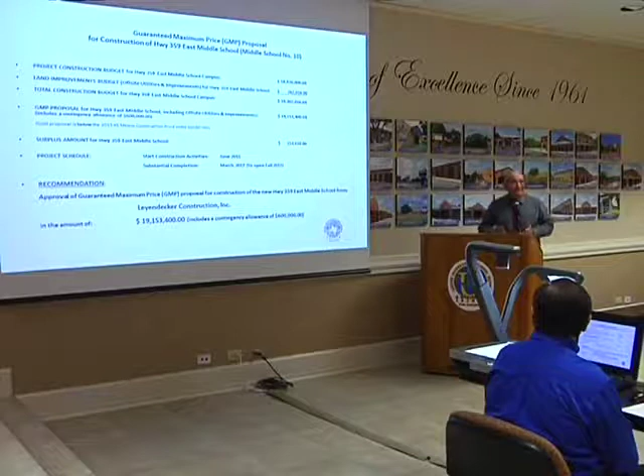As far as the timeline, we're looking at starting June 2015 to complete it by March of 2017. It's late to open in the 2016-2017 year, but it would open in the fall of 2017.

So our recommendation at this time to the committee is to approve this guaranteed maximum price proposal for a construction turnkey of the new Highway 359 Middle School from Leyendecker Construction in the amount of $19,153,400. This includes a contingency allowance of $600,000, already included in that $19,153,000.

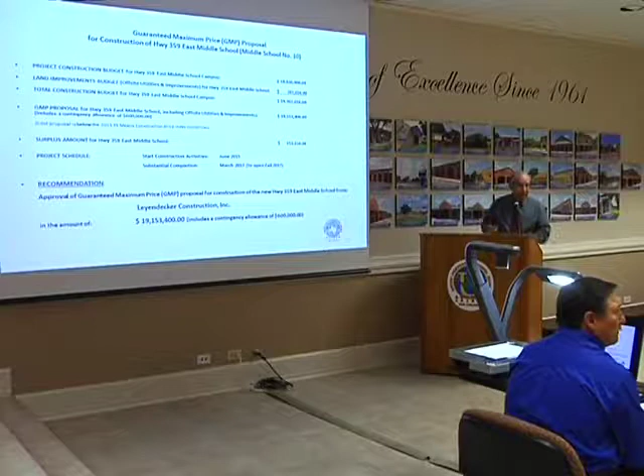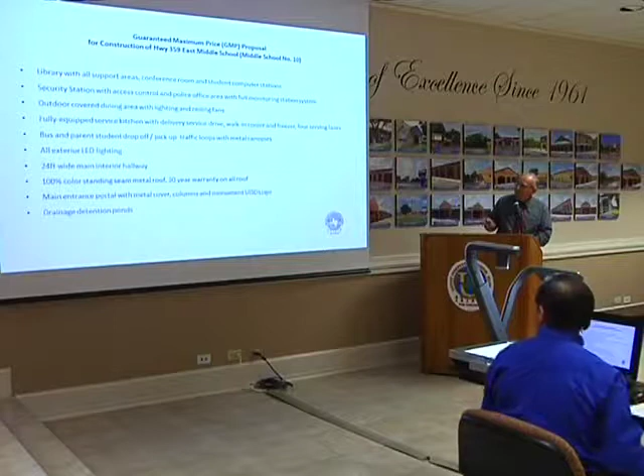In your handout, there's some description of the amenities included in this middle school. As you're familiar with, we presented it before: 1,000 student capacity, and it's basically all of the standards that UISD requests on all of our projects.

We do have some renderings on another PowerPoint from the architects of record who are working under Leyendecker Construction, Munoz and Architects.

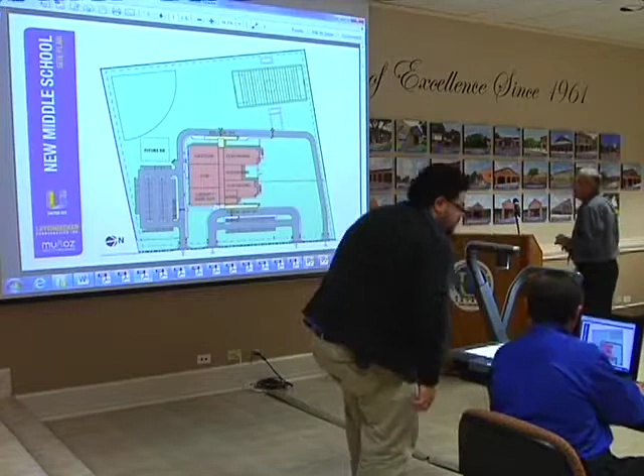There it is. Okay, this is our site plan, which we based the GMP proposal on. This is E.G. Ranch Road, which is currently already built to about right at this point. There'll be a little bit of extension required, but we do have the traffic loop, typical of all our middle schools. We have another loop for parents pick-up and drop-off, metal canopy, parking for staff, and all the athletic fields.

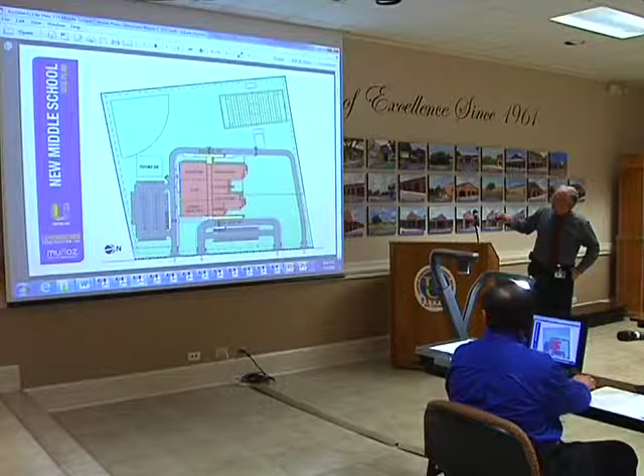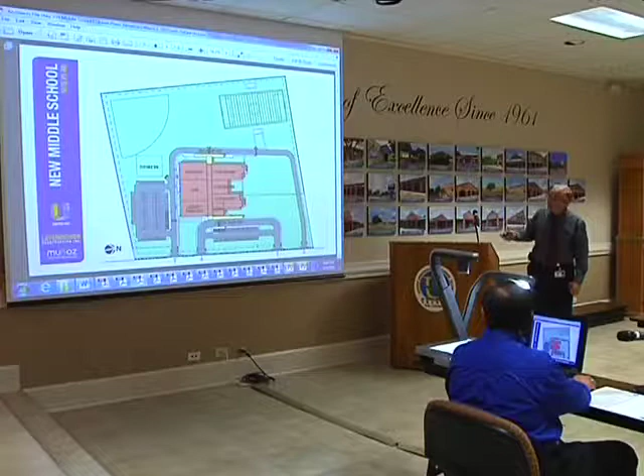We do have just a basic layout of the entire property. We do have a bus drop-off with canopies on the west side. So it follows all the standard typical design that we have.

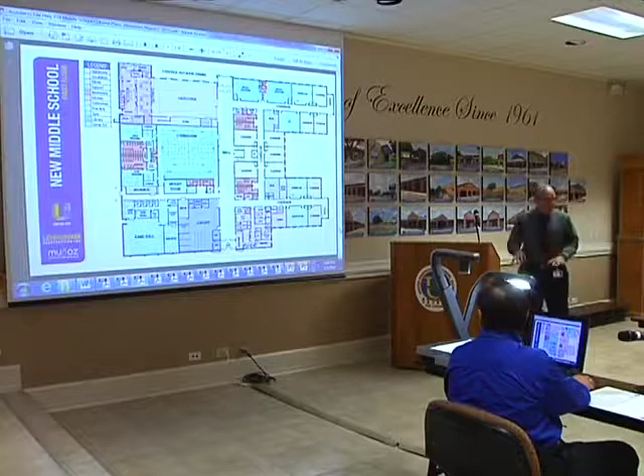Gym, pretty much a wood floor, the same standards as our previous middle schools. Cafeteria and outdoor area. We do have all the classrooms throughout.

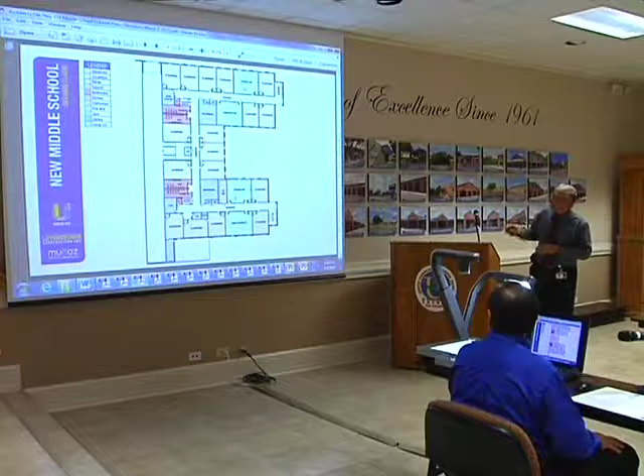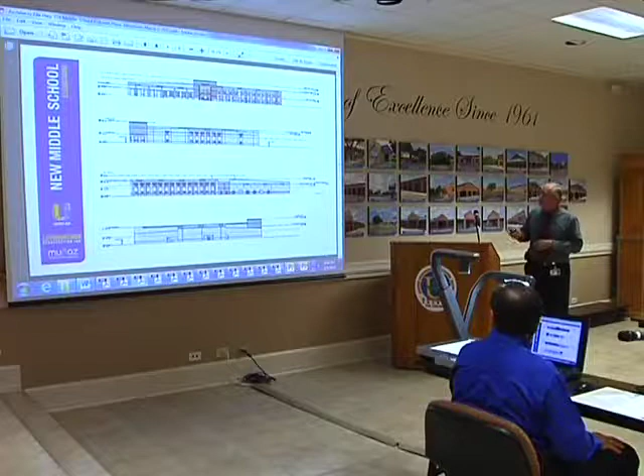In the second floor, we got the majority of the academic areas. We do have the classrooms, science labs, computer labs in each wing, home economics, and facilities for students first and second level. Some different configurations of the floor plan elevations.

Do you have any questions at this time?

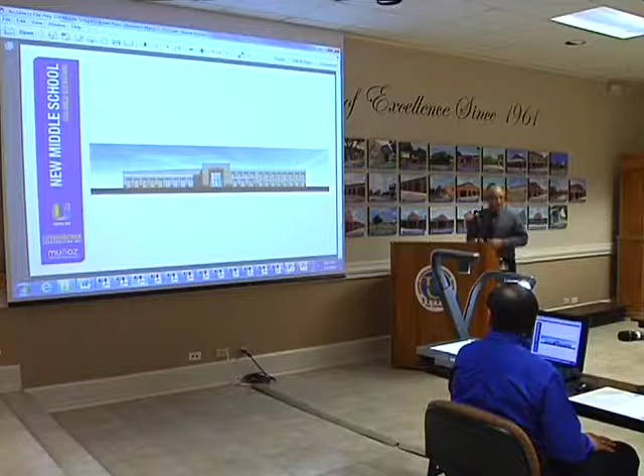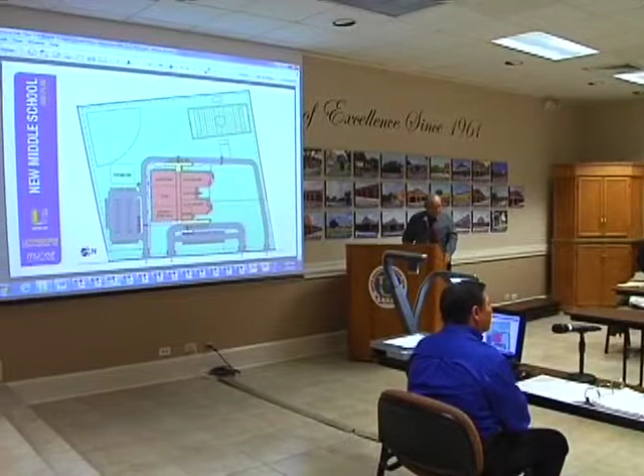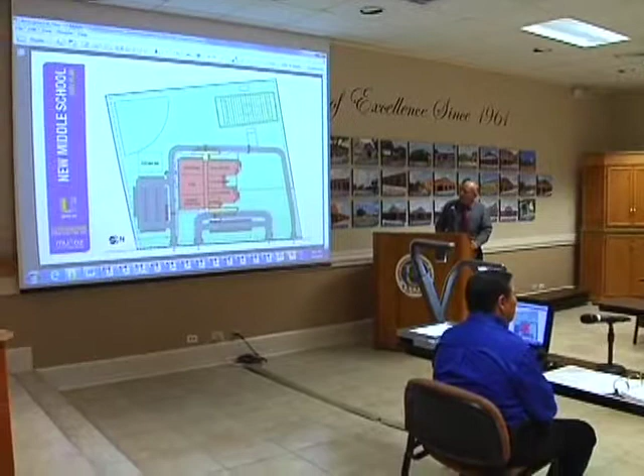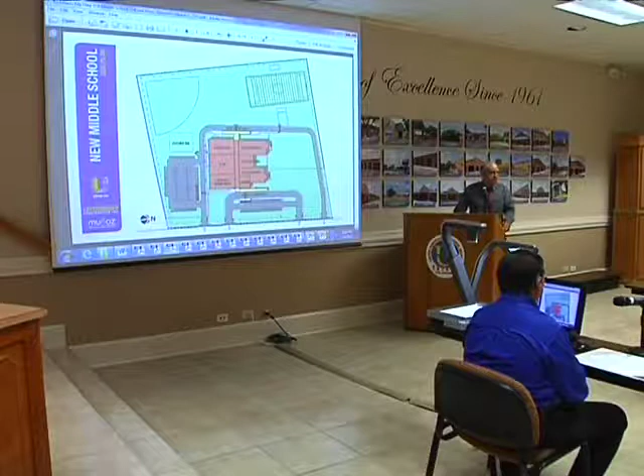We can definitely take a look at it. Now, this is a middle school, so I'm not sure if there's as much equipment. Right, so yeah, we can take a look at it. We'll visit with the coaching staff. There were several coaches in the design committee that gave us input. That never really came up, but we'll visit with them again, see if that's something they entertain. They didn't let them build that dome that they wanted.

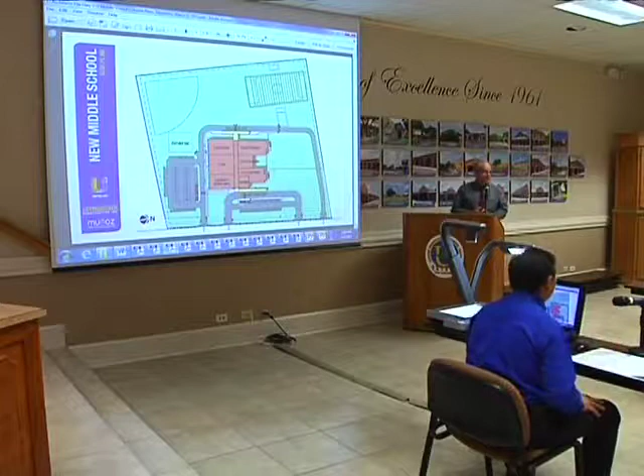Good idea. Thank you, Madam. Any other questions? I guess, thank you.

What we're asking is for the committee to consider the guaranteed maximum price. Does anyone else have any further questions of Mr. Rangel or Mr. Zuniga about this school? By the way, Mr. Gary Linebacker, principal owner of Linebacker Construction, is present.

I've got one question, Madam Chair. The gymnasium, I was looking at it, and it's got all the amenities, but in terms of long-range planning, for an emergency shelter for that area of the city, is there a potential disconnect for a generator to run the gym by itself?

At this point, it does not include it, but we did tell the engineers to prepare the main electrical service to very easily attach that system in the future. Yes, because you had given us that input, and when we visited with the electrical engineers, they said they'll leave it prepared for that. Thank you. Any further questions?

If none, then I'll entertain a motion. Madam Chair, I move that we recommend the approval of this project. Is there a second? Second. All those in favor? Aye. Any opposed? Thank you, motion carries. And for the record, Mr. Fred Villarreal, committee member, has joined us.

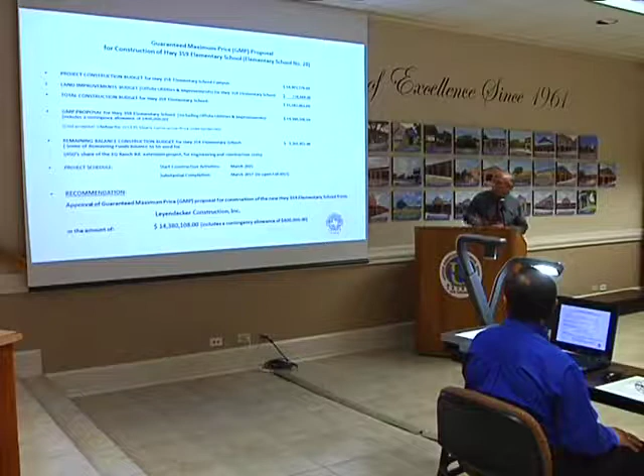But at this point, we're contemplating it be anywhere between $400,000 and $500,000. But until we get bids from the private developer, we really won't know the amount. Now, on this project, as far as the schedule, we're looking at starting this month. Mr. Leyendecker is ready to begin construction on this project as soon as the Board of Trustees considers your recommendation. And then the completion would be a year later, March 2017. This campus is scheduled to open fall of 2017.

At this time, our recommendation is for the Bond Oversight Committee to approve the guaranteed maximum price for 359 in the amount of $14,380,108. This includes the allowance of $400,000, and it is within the budget allocated for this project.

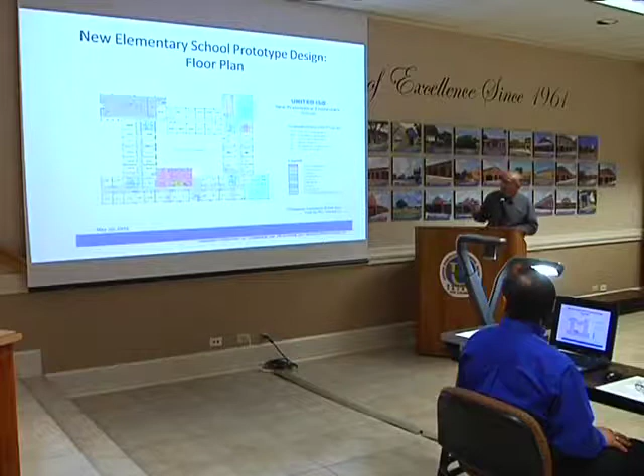There's the floor plan. Again, it's our prototype. It's the same as Cielito Lindo with some enhancements that have been recommended by the committee of teachers. And we've included that in this slide. It is the same capacity, same square footage. It did not increase in size. It's just some of the finishes that were changed, and some of the items; they're all included in your packet.

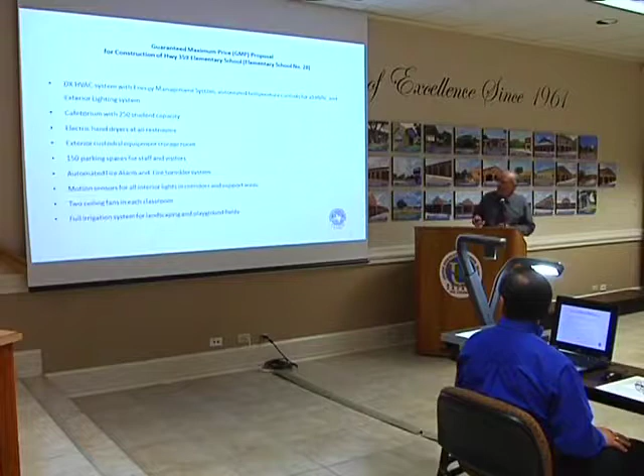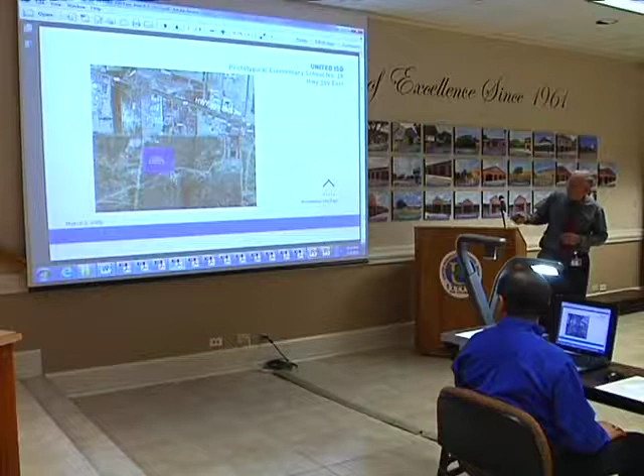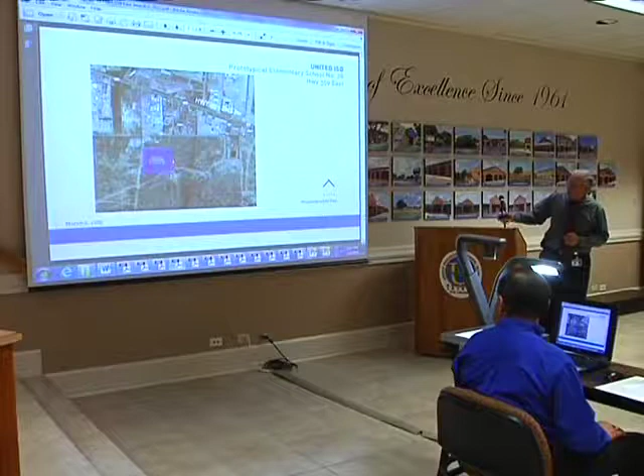There's another PowerPoint, just briefly, that architects Eric Quiroga and Rick Solis and Mr. Sanchez, working under Leyendecker, provided. Here it is. Again, this is the aerial location of the property, 359, the elementary. The middle school that we just discussed is located right here. This is our transportation center. So the road that we have to extend in agreement with EG Ranch Development will be facing the entire property. And we got to extend sewer lines, and detention ponds have to be built for the middle school.

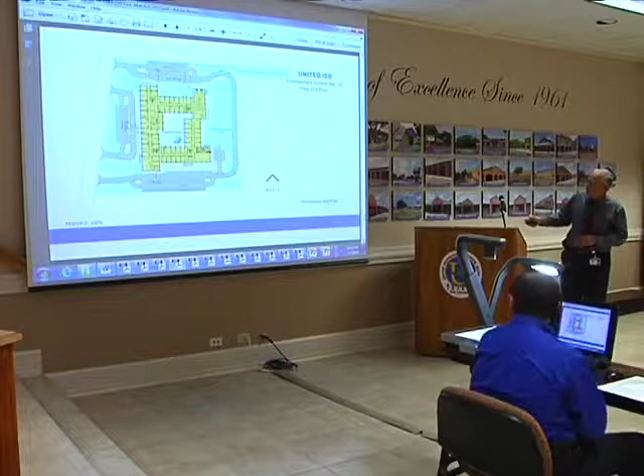Here's the site plan. Basically, this is, again, the EG Ranch Boulevard that will be extended. And the same configuration as Cielito Lindo, our prototype design. The traffic loop, teacher parking on both sides, and we have the courtyard. We have the entrance to the gym, library, and cafeteria. Again, the same floor plan that was approved previously.

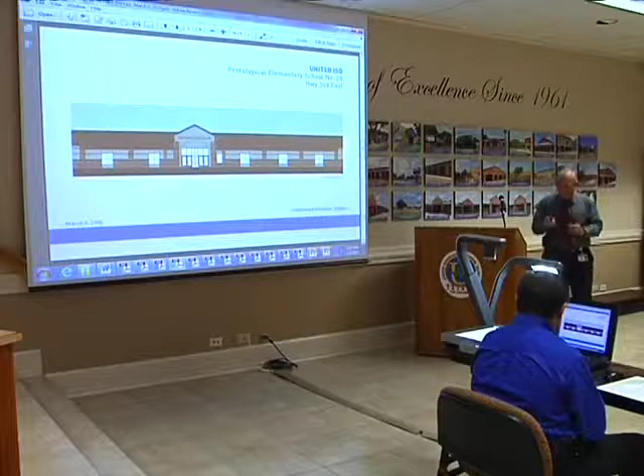As far as the elevations, they will be different from the elementary school at Cielito Lindo. As we requested from the design-build team, every campus would have a different elevation, different entrance, and different materials, but keep the same configuration of the floor plan, which is a very efficient design. This is the rendering they're proposing. It is different from the previous elementary school. Let me review it. And the color of the roof will also be different. The brick and color of the metal roof would be different from Cielito Lindo. That's all we have. Any questions on this?

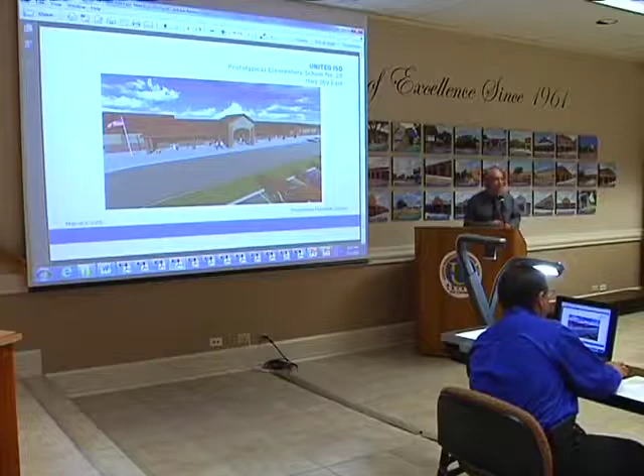Madam Chair, I have a question. The outside improvements on the extension of the E.G. Ranch Road, right? Correct. How many linear feet is that extension, more or less? I believe it's close to about 1,400. 1,400 linear feet? Yes. And what is the back-to-back on that road? It's 36 feet at this time, back to back. 36? Yes, sir. And it has a middle turning lane. It's a 3-lane road. Yes.

Now, as part of the middle school, E.G. Ranch Road that is already built will be widened to also have a turning lane. The reason we want to have the wider road, Mr. Arreal, is because of the transportation. Sure. Because of traffic there. Yeah, but you got the bus terminal there coming in, and then you got the schools back-to-back. So the volume's there. Is your traffic engineering adequate for what you're gonna do there?

Yes, CEC Engineering did the traffic studies, and they visited with the city traffic department and planning department, and it was more than enough. Because the other thing is when E.G. Ranch develops further their properties to the south, there will be a lot of traffic from that subdivision. Right. So all that is being anticipated. Now, the bulk of the cost on the road is being paid by the developer.

We have an agreement with them, but ours is just what has to do with the utilities and outside improvements for the elementary school. The actual road is being financed 100% by E.G. Ranch Development. Okay, so we're then paying for the sidewalk and entrances into our school. And basically then your big cost there is extension of water and sewer, what? Water, sewer, storm drainage, and then the detention ponds.

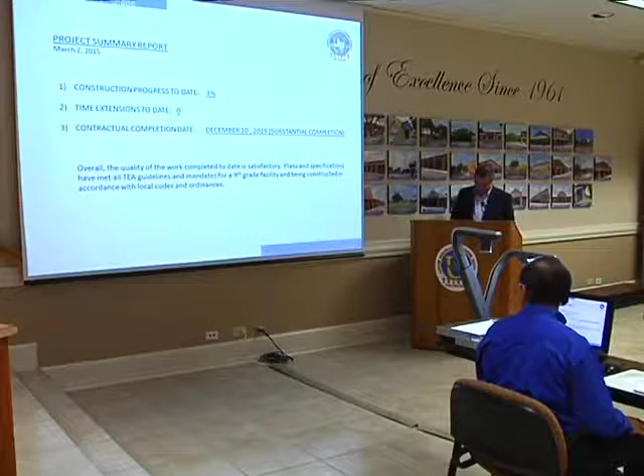Current bond project status report. Okay, good evening, bond committee chair, members, and administration. Ignacio Lanez, Director of Construction, presenting the project status report. The first project we have is the United South High School 9th grade campus. The construction progress to date is at 3% completion. There have been no time extensions requested to date. And the contractual completion date remains December 10, 2016.

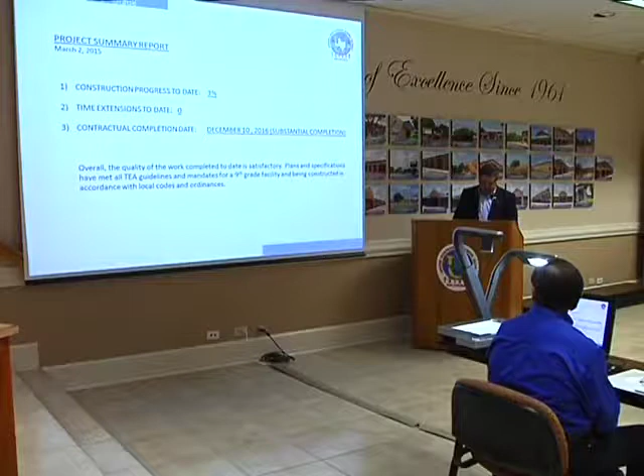Okay. For the week ending February 27, 2015, progress of construction on the following site activities are as noted. Work in progress: cut and fill operations in progress as the site grading activities continue. On-site utilities, soil testing, and site surveying continues. Material for foundation structural footing has arrived on site and is being prepared for installation.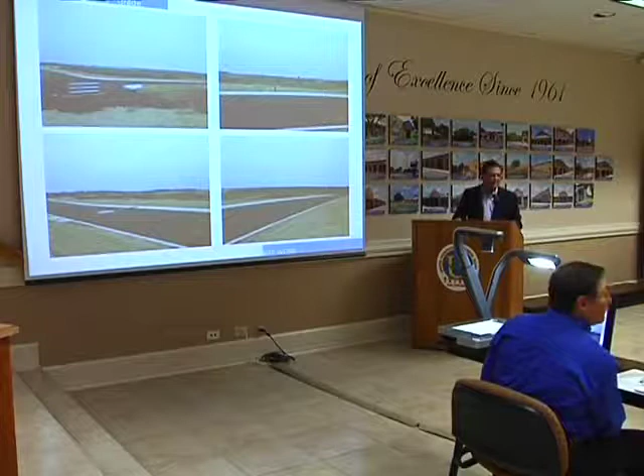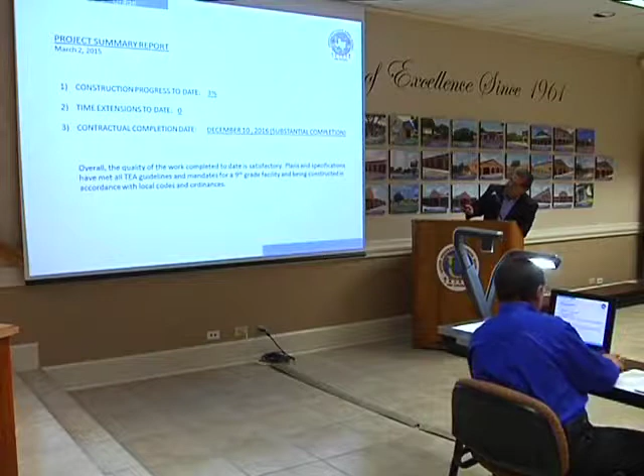Let's see. Excuse me, this is the ninth grade. Okay, I'm sorry, let me backtrack. This is the United Ninth. I had the United South as the first project. Oh, yeah, we have United South. I have United South 9th grade. You have United South? Correct. Okay. Pictures. Yeah, we have it here. Okay, I guess we're going back to that. We have the pictures here.

Okay. Well, as the pictures reflect for United South, we have some of the reinforcement being assembled on site for the footings for the building slab, and as you can see in your photos, a lot of the grading continues, and a lot of site work, and they're preparing for utility work. The testing lab of record has been on site, and it's been testing the soils as the site work progresses. And again, we will be having our consultants on site verifying and comparing what's on site to the plans.

So should we go to? Are there any questions on United South High School 9th grade? Next one will be the elementary school. Yeah, next we can do elementary school number 27.

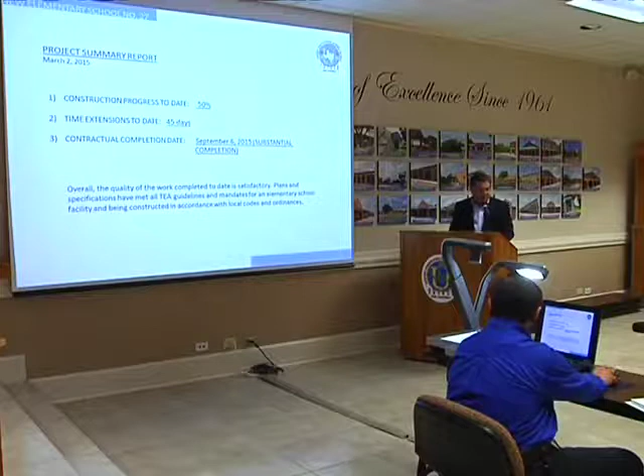Thank you. Going to elementary school number 27 in Cielito Lindo subdivision. Construction progress to date is at 50% completion. Time extensions remain 45 days, as was requested a month ago. And September 6th remains the substantial completion date.

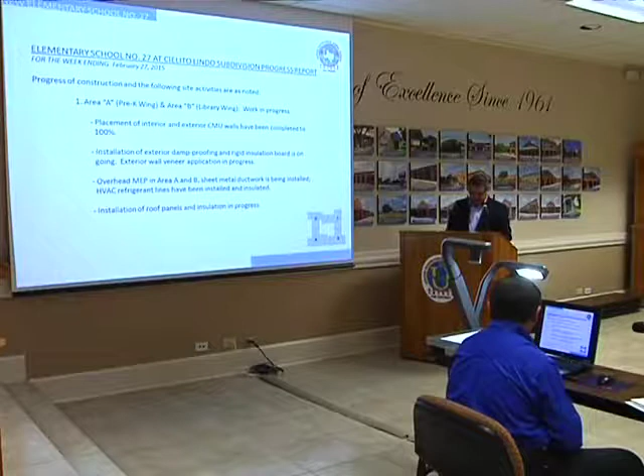Okay. For the week ending February 27, 2015, progress of construction on the following site activities are as noted. Area A, the pre-K wing, and Area B, library wing, work in progress. Placement of interior and exterior CMU walls have been completed to 100%. Installation of exterior damp proofing and rigid insulation board is ongoing. Exterior wall veneer application in progress.

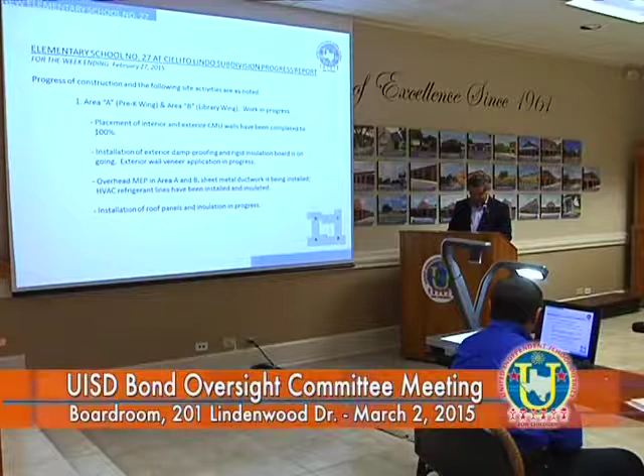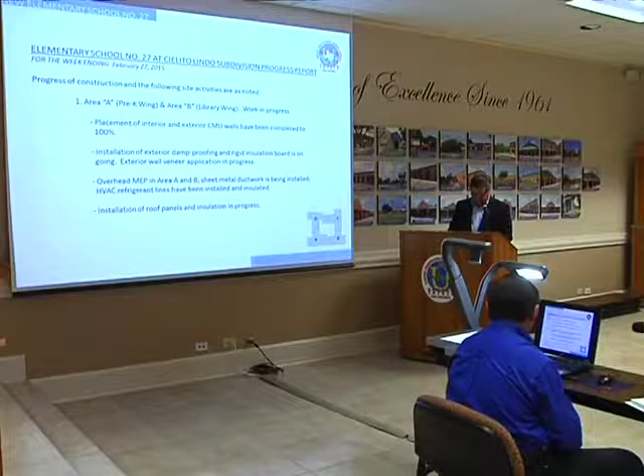In the overhead, mechanical, electrical, and plumbing in Area A and B, the sheet metal ductwork is being installed. The heating, ventilation, air conditioning refrigerant lines have been installed and insulated. And the installation of roof panels and insulation is in progress.

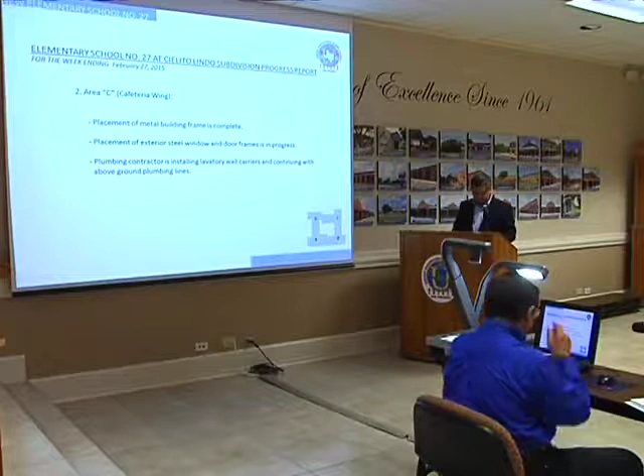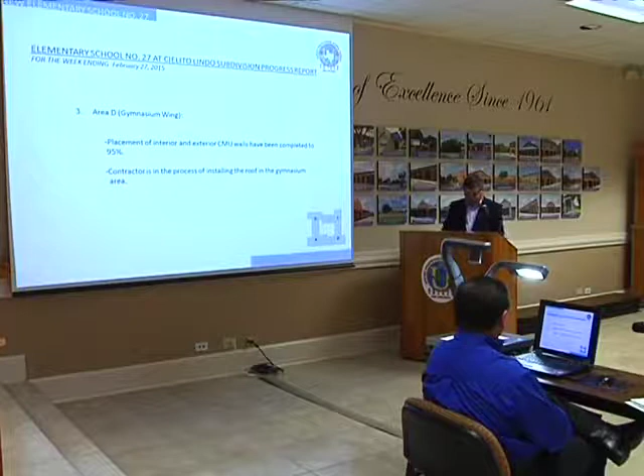Okay. In Area C, the cafeteria wing, the placement of the metal building frame is complete. Placement of exterior steel window and storefront door frames are in progress. And plumbing contractors are installing lavatory wall carriers and continuing with the above ground plumbing lines. In Area D, the gymnasium wing, the placement of interior and exterior CMU walls have been completed to 95%, and the contractor is in the process of installing the roof in the gymnasium area.

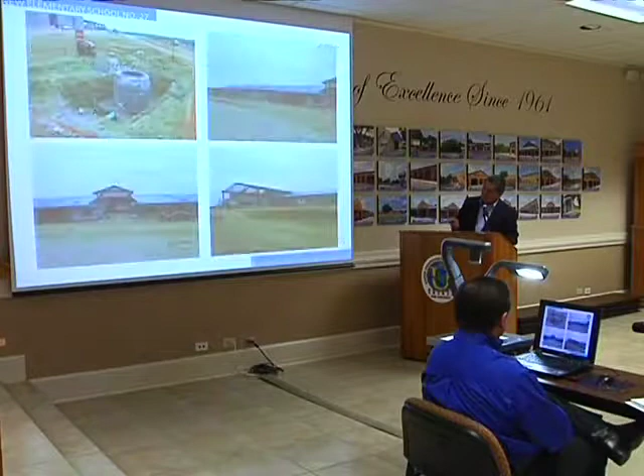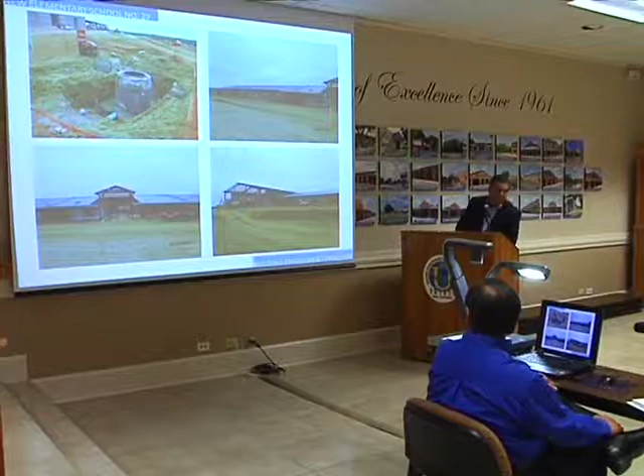Now, these are some photos throughout the site and of the building as work in progress. You can see we have some of the major utility installations going up in the left-hand corner. On the right hand, you have the building entrance showing the veneer already being installed, as well as the roof panels, the colored roof panels. You got a view at the bottom left of the main entrance structure, and you see some of the framing of the gymnasium area.

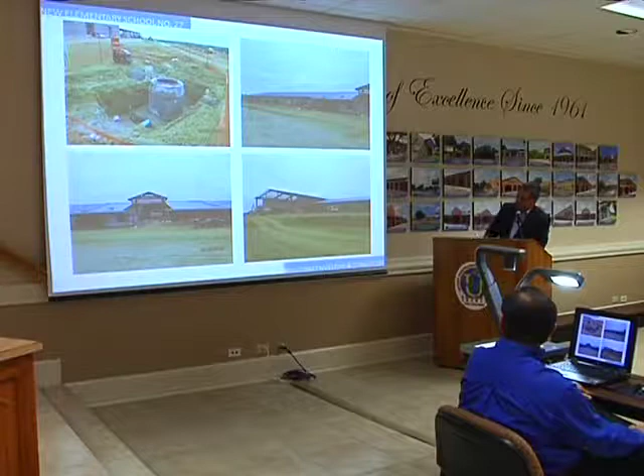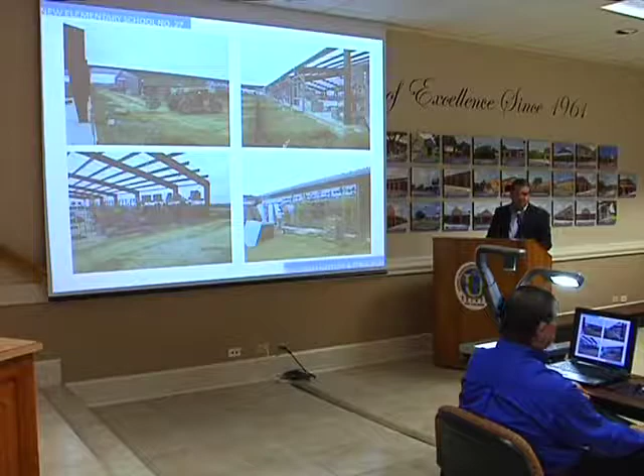Mr. Allen, this was the first one we started with. Yes, sir. What was the date that we started on it? We started this one approximately, I believe, 4 months ago. So we're at 50% now? We're at 50% completion. They are going, and they have picked up the pace, though inclement weather has been a factor. They continue working, you know. Yeah, September 6th, is that the date with the 45 days extension already included? Yes. Yes.

And again, these are more photos of work in progress from the courtyard. Excuse me, if it doesn't stop raining, we are gonna get in trouble sooner or later, but there still is a very good chance we're going to make the opening school date, so we feel very confident, but really, we've lost a lot of time.

Yeah. It just hasn't stopped raining. You know, today, the sun was supposed to come out. It is. I guess it overslept. Well, at least we're not in Boston, you know.

And these are some views of the interior work in progress. Any questions on elementary school 27? So then the 9th grade campus. Now the United. The one about.

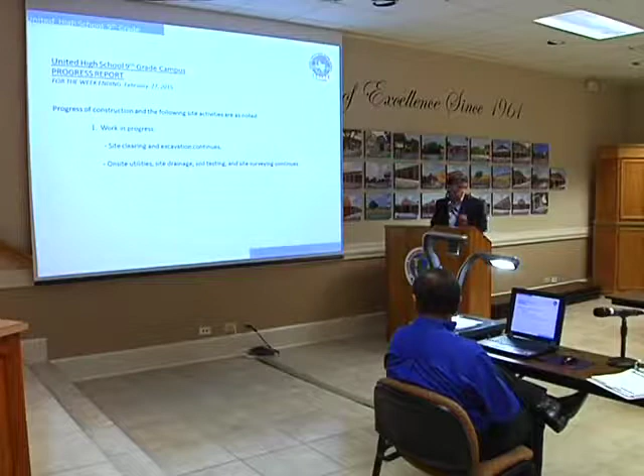These are just a few photos of some of the clearing done on that site. And there have been some improvements done on some drainage to help with some of this rain that we've been getting. But this is just getting off the ground.

In the future of this one, is the city requesting any traffic lights up on International? When the school's in, will it be stop signs all the way through? Not a request yet. Because it's gonna be heavy traffic, I mean. Probably when the developer goes to subdivide their properties. That's probably the time. But you guys haven't been asked to install? Because for a while, we're gonna be the only one out there. Yes, for the most part. Yeah, so, it's traffic, that stuff. No.

Well, that concludes the progress status report on the 3 projects ongoing right now. If you have any questions? Thank you, sir. Yeah, thank you. Thank you, Nach.

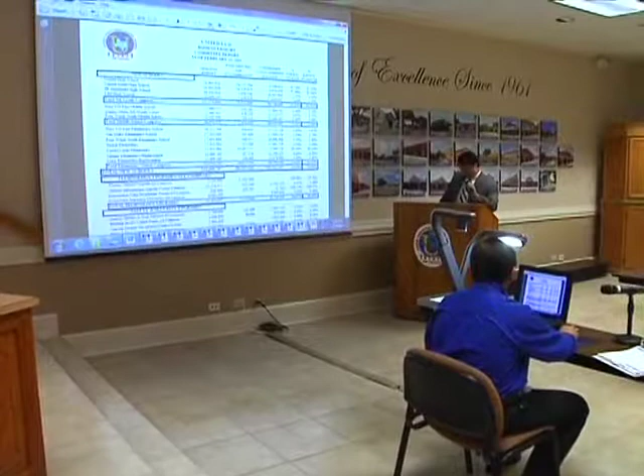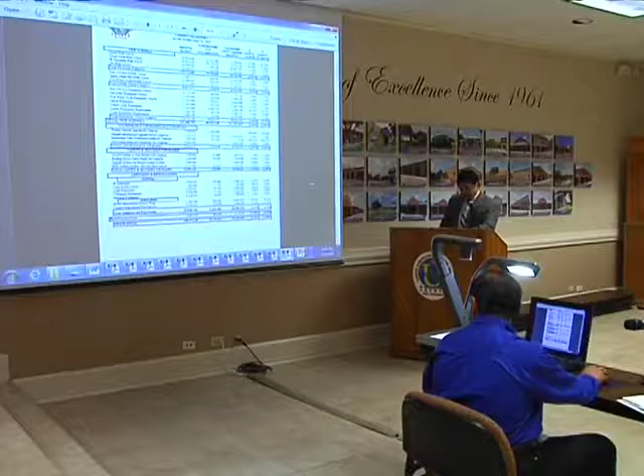Bond Program Financial Report, Mr. Sam Flores. Yes. Good evening, Ms. Haynes, members of the committee. The bond funds as they stand right now are expended at 23.43%, which is up a small percentage of 0.34% from the prior month. We've encumbered and spent $95.7 million of the $408.7 that was authorized. The major movers were the 4 high schools and the 7 elementaries.

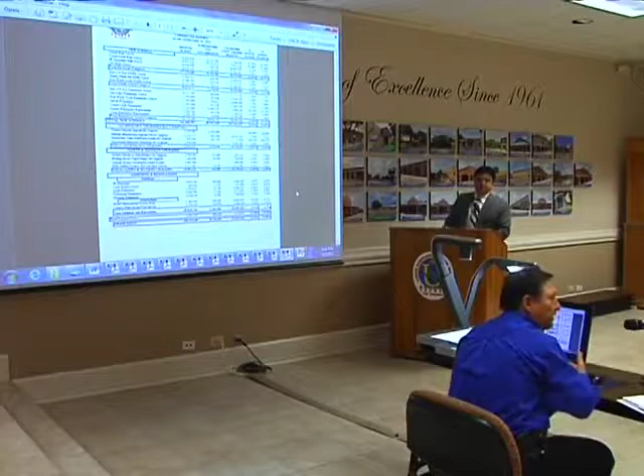We issued a PO to Terracon for engineering services, and then we had a small PO of $125,000 for the network infrastructure upgrade under the technology upgrades for all campuses. And then the details behind this is the summary page of all the finances. The detail is behind that. That should all tie to these numbers. Yes, it does tie to these numbers. On the signature. Yeah. Any questions? Thank you. Thank you, Sam. Okay, next we have open agenda.

Committee members, there's been something I was thinking about. I don't plan on going anywhere, but say something happens to me on my way here and I don't get here. I think the committee should have the ability to call the committee to order out of respect for everyone that comes in to present to us. And I don't believe our bylaws have that at the moment. Am I correct? I believe you're right. So I would like you to discuss, or you all think about how we approach this so that we can ask that that ability be granted to the committee.

I guess one way would be to modify the bylaws to include a vice chairman. Well, there's a vice chairperson here as well, but exactly. Or a temporary chair to run the meeting if the chair and the vice chair are not here. I think if we word it, as long as we have a quorum, we can proceed. Yes, that's what I would like for you all to consider, because you never know. So if we have quorum and Madam Chair's not here, there's no meeting? Is that how it's worded now? I think that's the way it's worded.